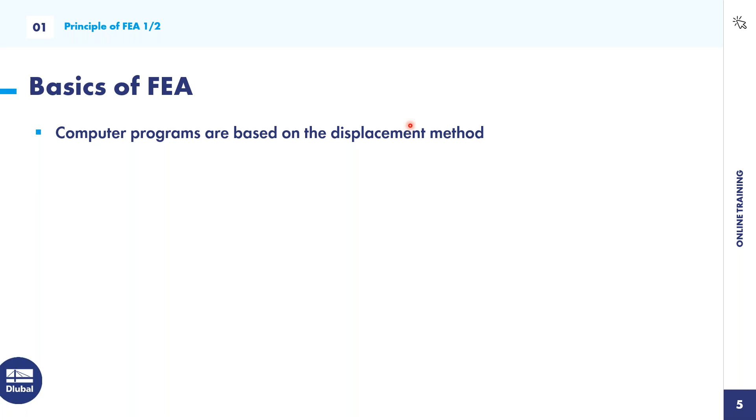This is maybe also something you learn in your studies, the displacement method. Maybe someone of you also knows the force method, where the unknown is the force, where you have to calculate first the force, and then you can calculate the internal forces. Here, the FEA programs work with the displacement method, so the unknown of this whole calculation process is the displacement. You calculate first the displacement vectors, and then you can calculate the internal forces and also the support reactions and so on.

This analytical solution of very complex structures is in reality really hard possible. So when you want to calculate something by hand or with Excel, you are going to reach the limits, because it's very hard to realize realistic results. So you have to use some FEA programs, some FEA software.

So what's going to happen there? The real structures are decomposed into a mesh of finite interconnected elements. That's also the name of the finite element analysis. So the real structure is decomposed into a mesh of finite interconnected elements. We will see it later in the example.

And then on each node of this FE element, the properties of the element continuum are described. Then the mechanical behavior is described by approximation sets. These approximation sets are the secrets of every software producer, every software creator. It's very complex.

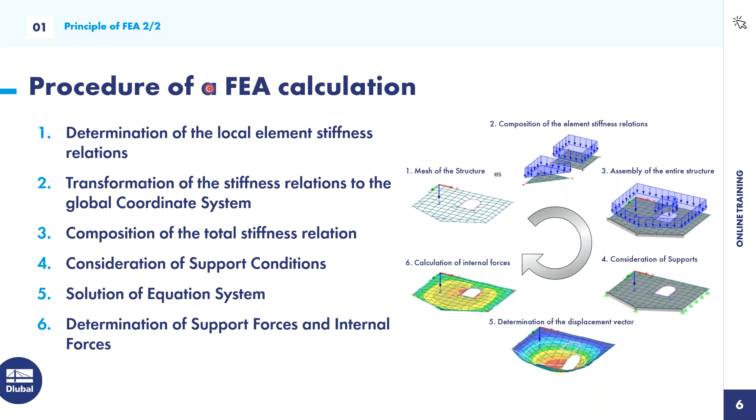And this was the basic procedure of an FEA calculation. And now we are going to do this little example. So first of all, we are going to model these three continuous plates. And then we are going to compare these results of this bending moment with a continuous beam. This will be very interesting, because then we can see the different results and so on.

Good. So let's jump to RFEM, the program.

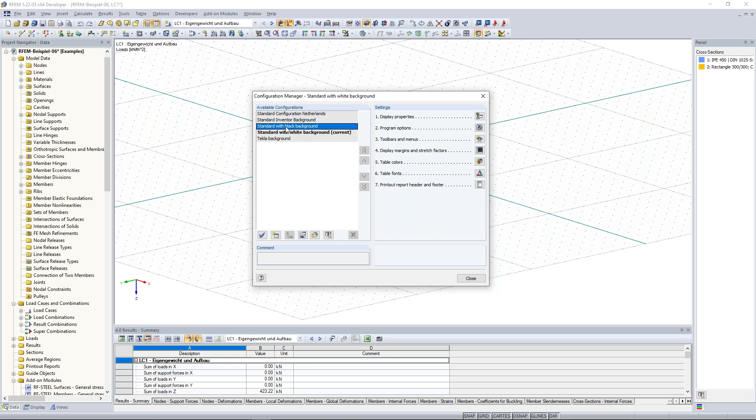So for those who are wondering why is my background white, here you can change it when you click on options and then to the configuration manager. And there you can see there is standard with white background. You can change it to the black background. So when I click here, standard with black background, double click and the background changes to black, but I prefer the white background. So double click again, and I have a white background.

It's up to you how to use it. I prefer the white background, but it doesn't matter. They give you several other options and also some edit possibilities and so on.

Below this menu bar you see the symbol bar. With the symbol bar, you have faster and quicker access to the most common used functions. So if you want to create some lines, just click on new line and draw your lines. This is very fast. By double right clicking, I finish and end this insert, and it's the same with a lot of other functions.

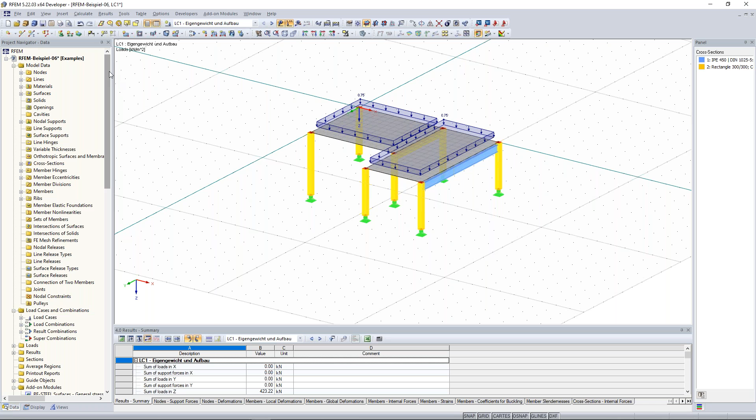On the left side you see the navigator. The navigator is very important for working with RFEM. You see all model data in the data navigator. Generally it has 3 tabs: the data navigator, the display navigator, and also the views navigator.

When I show the results of this structure, I also have the 4th tab, the results tab. But I want to begin with the data navigator.

With the data navigator, you have all the possibilities to have an overview of data like the nodes. When I click on one node, the node is selected, and with right click on that, I can also find this node, I see this here with the arrow. It's the same with the surfaces - all surfaces I created before, I can click on that and modify them, edit them, by just right clicking here.

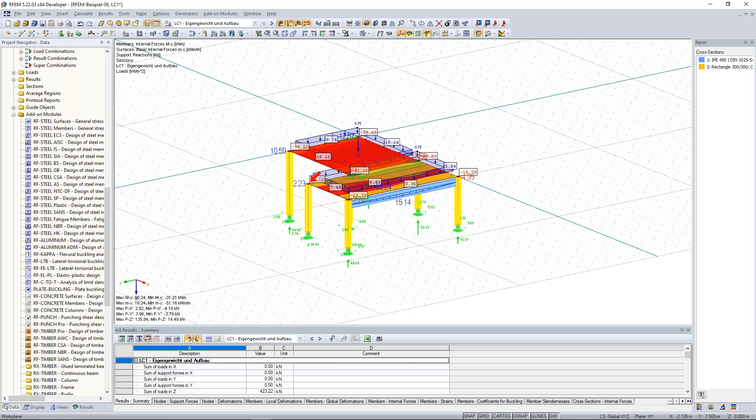It's also the same with load cases and loads, results, and so on. At the bottom you will find the add-on modules. Remember, RFEM is good for the calculation of internal forces, deformation, stresses, and so on. But if you want to design something, like a steel column or a concrete downstand beam, you have to use our add-on modules. They will give you the designs for different materials and areas like steel, concrete, timber structures, while RFEM is just for the calculation of deformation and stresses.

The next step is the display navigator. Here you can show models, loads, or extra results. In this case, I don't want to show the bearings, the supports. So I go to the models, then to the area of nodal supports, and deactivate it, and then I don't see these nodal supports anymore.

The same with the loads. When I don't want to see these loads, I have some surface loads here. I click on loads and deactivate the view of the loads. There are a lot of other possibilities too - maybe when you want to show the numbering of all objects, just click here at the display navigator, go to the area of numbering, and you see the numbering of the objects.

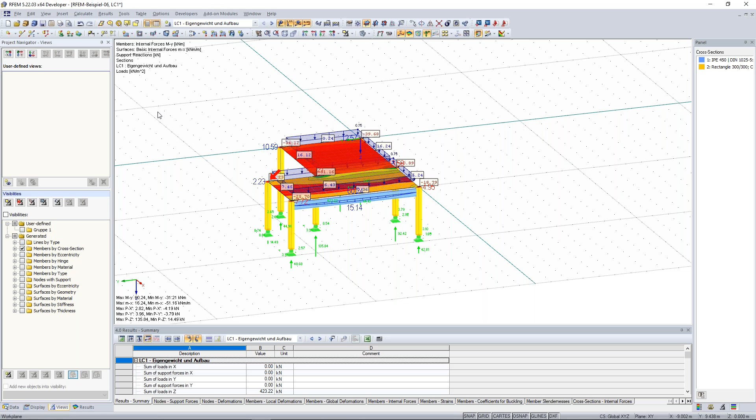Good, then I jump to the Views navigator. It's very helpful to work with a lot of views when your model is going to be bigger and more complex. So it may be for your interest to have some user-defined views. I close and deactivate the result view, and I like this view very much, so I save this view.

I can click here, create new user-defined view, and I write the favorite view. During my working process, I change maybe some views in order to work better with the program, with the model. Then when I want to skip to my favorite view, I just click here in the Views navigator to user-defined views, and you jump to your favorite view.

The same applies to visibilities. When you want to filter something, to show just the members or the columns, it's very easy to do here with the views. Now I want to show just the columns. I click here, members by cross sections, and I know the cross section of my columns is 300 by 300. So I click on the rectangle 300, 300, and all columns are shown.

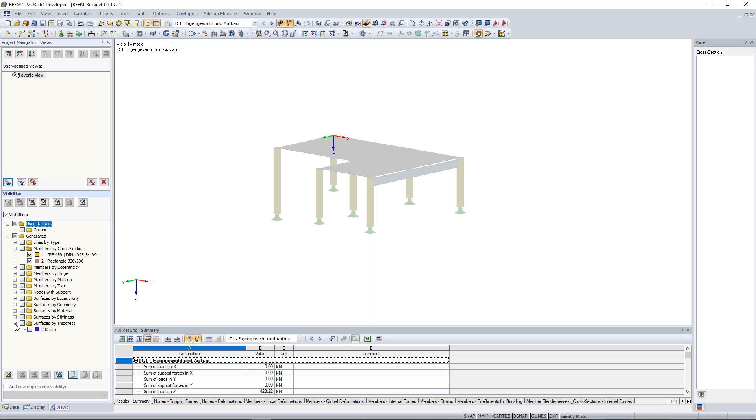When I want to add this downstand beam, this IPE profile, I click on that. And the same with the surfaces, so I click here, surfaces by thickness. I have two surfaces with a thickness of 20 centimeters. I click on that, and it shows me the surfaces.

Now to the fourth tab, the last tab of the navigator. Here I can show the results, first of all maybe the deformation under global deformation, but also some internal forces. So when I cancel the visibility mode I did before, I can show the bending moment.

Yeah, also the support reactions. Everything concerning showing the results you can manage here by the results navigator.

Good. Then something to the tables. Tables acts in a similar way to the data navigator, so when you want to create something new, you can do it here just by creating a new node. The same for the lines and surfaces.

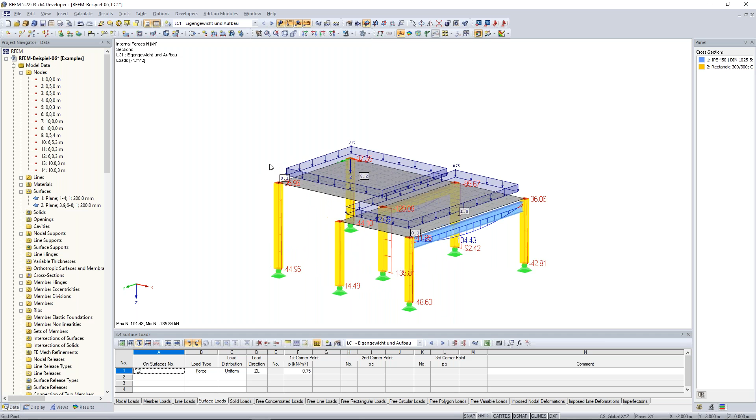Note the difference. With the mouse wheel, you can zoom in and zoom out. This is very important to know. When I press the mouse wheel, I can move my work plane, which is also important to know.

And with right clicking, I can open this context menu. Just clicking here on the work plane opens this context menu. When I do this on an object, it opens the context menu of that object, in this case the member or the line.

Good, and also when I want to rotate this building, just press the Control key on your keyboard and then press the mouse wheel, and you can rotate it. You can do the same functions here in the symbol bar with this icon for move, zoom, and rotate - you have the same possibilities and so on.

Good, so far to that. Now I have prepared some questions for you. Let's start with this one: I want to know from you what is a discretization. We had it before in the PowerPoint presentation.

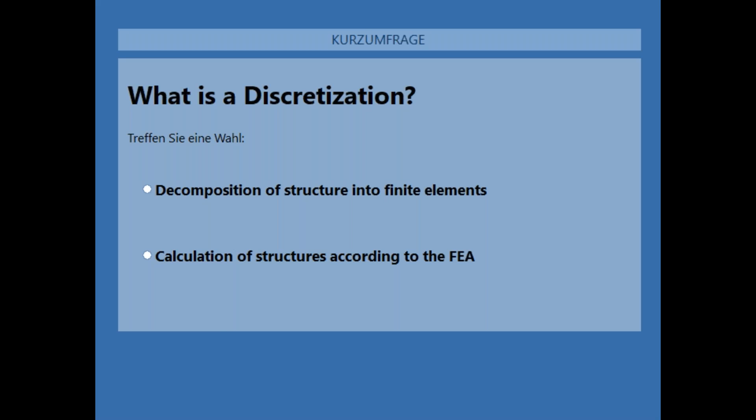Good, almost all of you have answered, let's show you the results. So yeah, 75% were correct. The discretization is a decomposition of structure into finite elements, good to know.

Good, and the next question is concerning RFEM. I want to know what is RFEM, what can it do.

I have to take a sip of water.

Good, 90% have voted, so I close this poll window here and show you the results. RFEM is a 3D FEA program for calculating members, plates, walls, folded plates, shells, solids, and also contact elements. So everything is there. But it's not a 3D structural frame analysis program - that's RSTAB, another program in our software suite. With RFEM you can calculate members, so also frames, but not only that - also surfaces, plates, shells, and so on. Keep that in mind when you work with our programs.

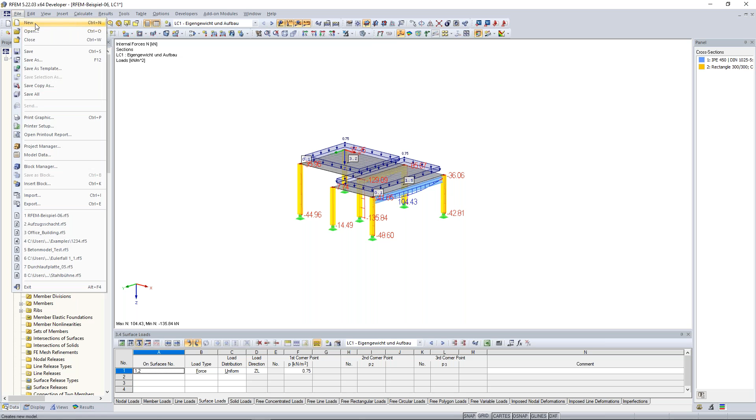Now let's start with the creation of our continuous plate. I create a new model - just click here on New Model, or go to the menu tab and say File, New. After that it opens this General Data window, and here you can insert the model name. In this case I give the name Continuous Plate.

You can make a short description, it's up to you. I save this to my folder examples - it's up to you, you can create a new folder, so a new project, or search for the right folder here at the project manager, it's up to you.

For me it's very important to differentiate this type of model. Here you have the possibility to choose different types of models - you can create a 3D model, 2D, and different types of 2D. This 2D type is especially for plates loaded by forces perpendicular to that. And this other 2D type is especially for walls or for 2D frames with parallel loads - these are plates acted on by wind loads, for example, where these wind loads act parallel to the plane. Keep that in mind.

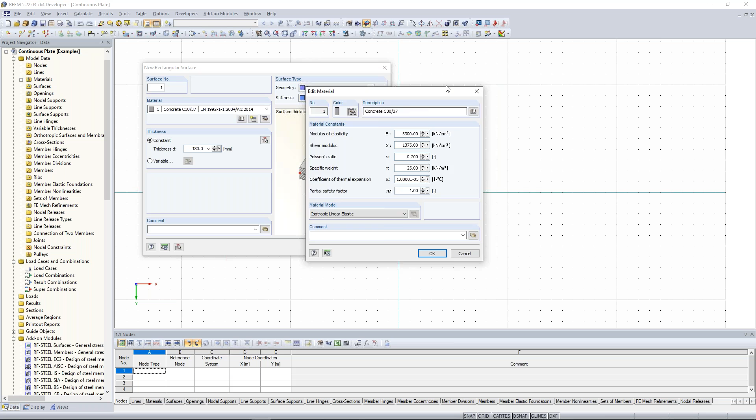For those where this concrete is not activated, you can modify or edit the material here just by clicking on this icon. You can put in your material constants and properties yourself, or you can open the material library and choose one of these materials from the library. In this case I have this concrete material.

I have normal concrete, not lightweight concrete, and I refer to the Eurocode. For those not from Europe - in Germany we use this Eurocode especially, and I refer to this Eurocode, but you also have the possibility to choose other concretes from different standards. But in this example I refer to the Eurocode. I choose this C30/37.

So what does it mean? The C30/37 concrete has a characteristic cylinder compressive strength of 3 kilonewton per square centimeter, and also a cube compressive strength of 3.7 kilonewton per square centimeter. That's what this C30/37 means. For those not from Europe, just click OK.

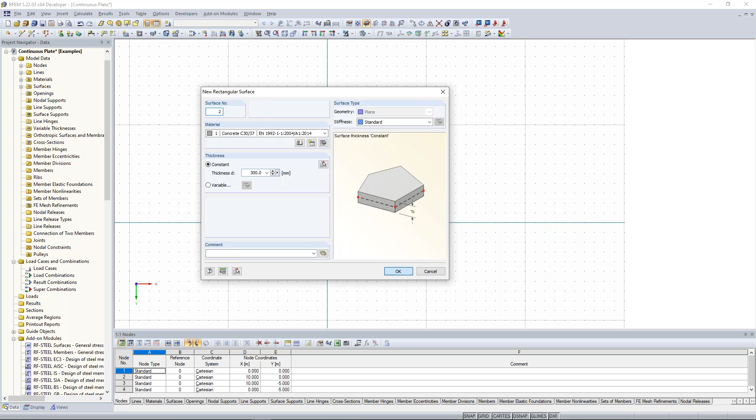Now to the next step. I want to create the same plate in order to practice it a little bit more. I create here a new rectangular surface again. The properties are already set, so I create the same plate again, but this time a little bit faster.

Now I want to copy this plate from there to there. So I do a selection window and select the whole plate, including the nodes and the lines. Now the whole surface is selected. By right-clicking, I open the context menu of these objects - I've selected the surface, but also the 4 lines and the 4 nodes. But I want to copy everything, so I click on move and copy.

To copy and move this plate, I have to enter more than 1 as a copy here. Then I choose the displacement vector, and the displacement vector for me is minus 10 meters, so the displacement is from there to there. I click on OK, and the whole plate was copied from there to there.

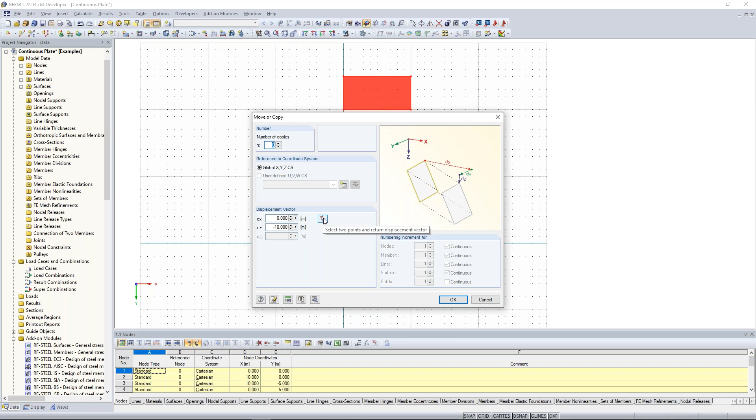Good. Now I want to move this 10 meters downwards. So I select everything again, then right click with move and copy. Now I don't want to create a number of copies, so set it to 0. I want to select my displacement vector, from there to there. I click on OK, and I copied it from there to there.

Good. To have a good comparison to our plate results, I want to create also a beam - a continuous beam. In this case, I have to create a new single member, to create beams, downstand beams, or girders, something like that. In RFEM, this is always new single member. So just click on that and click here to create a new cross section.

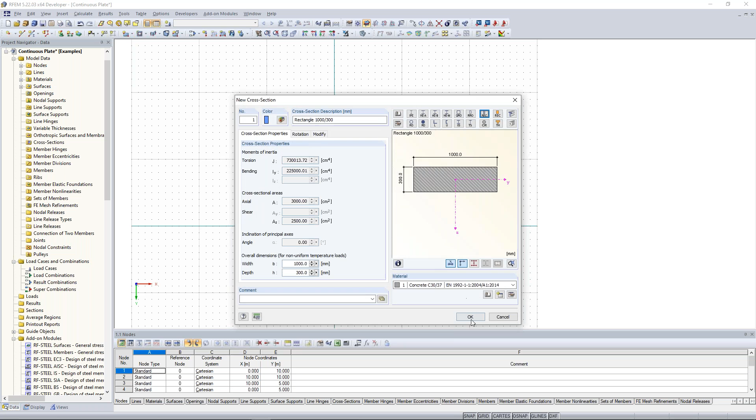I create a new cross section for member start. In order to have a good reference to the plate results, I want to create a rectangular solid cross section. I click here on the overview of cross sections, to the solid cross section rectangle, and type my values of a width of 1000 millimeters and a height of 300 millimeters. The material is the same here. Just click OK, apply this again with OK, and press this also again with OK.

Then I model this continuous beam from that node here to that grid point, and close this insert also with escape or with a right click on the mouse. Good. Next step is that we divide these lines in order to have lines to create line supports here. Now I change maybe a little bit my view.

We want to create a continuous beam here. So we need an additional node here to create our support, and also additional lines in order to create our line supports here. So we have to do that now. I change my view again to the front view by clicking on view in Z direction, and look again to this side to have this view. So what can I do?

I can divide lines in order to have an additional node on this line. So I click on the bottom line of this plate, of this surface, right click on that, and then I can divide the line graphically by n intermediate nodes or by distance. In this case, it doesn't matter what to use - everything is possible, but I want to show you the different options. So first of all, we do it graphically.

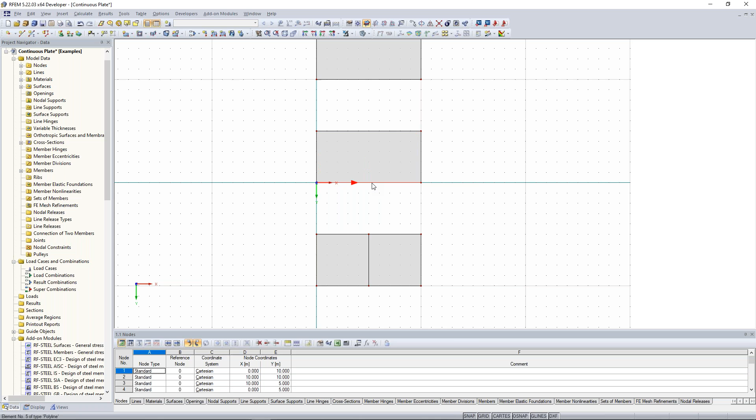And now click here from this node to this node. Good. By double escape clicking or double right clicking, I close this entry. We do the same again with this line. So right click on that line.

I divide the line, but in this case in intermediate nodes. Now it's very important to know these arrows. These arrows symbolize the orientation of the line. So every line, every member, has one node at the beginning and one node at the end, and this arrow shows me the orientation. In this case, this arrow shows from the left side to the right side. So this means that the line has at the left side its beginning node, so its starting node, and on the right side its ending node.

So when I want to divide this in intermediate nodes, and I put 1, it divides it at the half of this line. When I put 2, I have this. I have 3 lines, so 2 additional nodes, and so on. I put 1, and it was cut exactly at the half of this line. I create a new line again, from there to there.

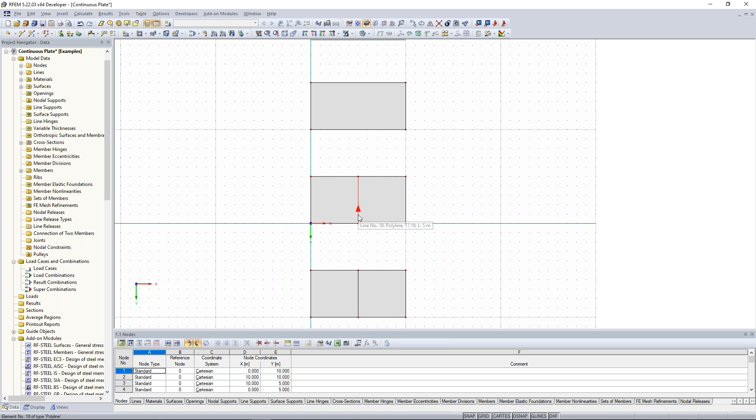Good. Now, a very important workflow in RFEM is copying something via drag and drop. This is important to know, it's one of my best tips to you. Just click on one of these lines, and now with the pressed Ctrl key and the pressed left mouse click, you can easily drag and drop something. When you want to leave it, just release the left mouse click. So again, I undo this with the keyboard combination Ctrl plus Z, and I want to do this drag and drop function again. So left click on this line, then press the Ctrl key and also the left mouse click, and release it here. This is a very important workflow and function of RFEM.

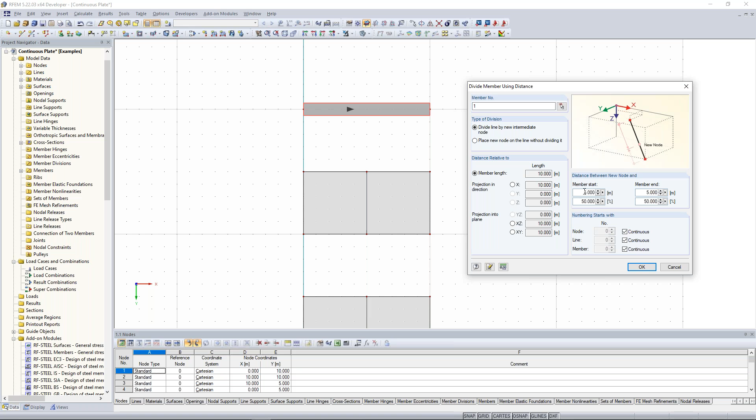Good. Now we want to divide this beam also. So I click here on this beam, right click on divide member. Keep it in mind, a member is also a beam or a column or something like that. Now I want to divide it by distance. Now I have again this orientation of this beam, the same again. On the left side I have the beginning node, and on the right side I have the ending node, because my arrow shows me from left to right. And I want to have the division here at 5 meters. I click OK, and that was it.

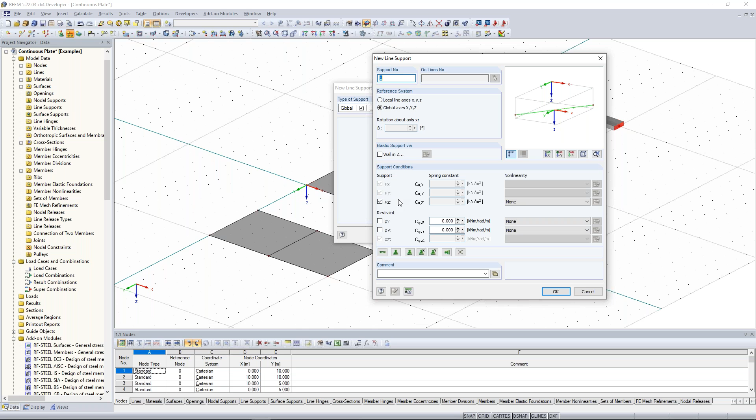Now I want to create the nodal supports and the line supports. First of all, the line supports, because we want to have here a continuous plate of these surfaces. So we need new line supports. Just click here in the symbol bar, new line support, and we choose this hinged support, because when we are going to watch these supports, we can do that here: create new type of line support. We see, okay, the UZ, so the support in UZ is activated. What does it mean? So when I activate some of these things here, restraints and supports, I block the deformation, I block the displacement or the restraints. So I want my support to carry vertical forces, so I have to block the displacement in the Z direction, and this is also the reason why there are going to be vertical forces. I press OK.

Now you can choose the local or the global. It's the same, you see it here at the arrows. Click OK, and now click on these lines here.

The same at the beam, but in this way I do it a little bit differently. So I select first of all this beam here, this part of the beam, because I want also to create here at these nodes this nodal support. Now I go to the symbol bar and click on new nodal support. And here in this case I choose again the hinged nodal support, click OK, and you see here the nodal supports. And for that point, for that node, we need a different nodal support, because at the moment it can be possible that the beam has torsion, and that it can rotate along its own axis, and this is something we don't want to have.

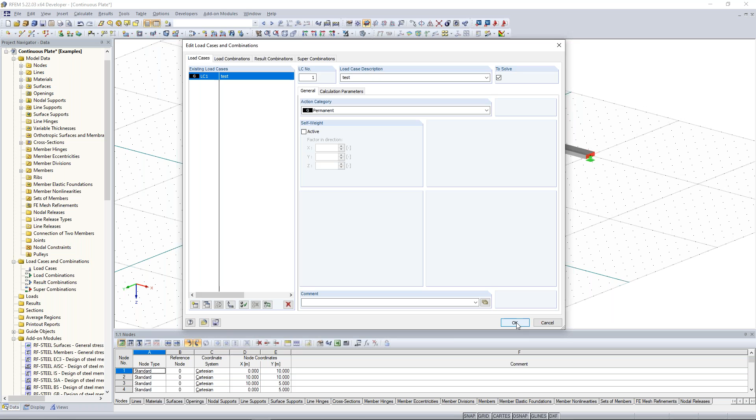Now I can put the loads on the surfaces and plates. Here I put the new surface load. It opens a new window, and I have the load type force, and the load distribution should be uniform, not linear, uniform constant. Because we are working in the 2D work plane, so we have a 2D object, 2D type, the load direction is only possible in the global Z direction. We have a magnitude of 10 kilonewton per square meter. Again OK, and I choose the surfaces here.

Good. Now I have to create it here also for the beam, for the member. Keep that in mind: we have in RFEM two possibilities of line or distributed loads, first of all the member load and the line load. Because we have a member here, it's very important to really use the member load for that. The line load is for the lines of a surface, like wind loads on edges. So when you want to put loads on edges of surfaces, plates, or shells, you have to use line loads. But if you have members with cross sections and so on, you have to use member loads. So keep that in mind, please.

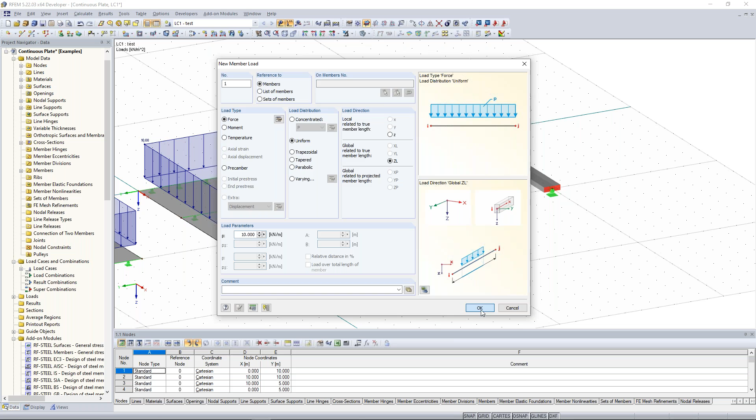I click here on new member load, put the same load parameter, 10 kilonewton per meter, and click OK. Good, so far to the insert of loads.

Praxitelis, I see some questions. Should we answer something? Should we do something again? We had several questions about the stiffness and the type of the plates. Maybe you could explain it in a minute. Could you explain about the stiffness type of plate?

Okay, of course. We have different stiffness types of plates. When I right click on one of these surfaces and click on edit surface, you see on the right side the surface type. First of all, the geometry - in this case we have a plane. So a plane is really when you have something in one plane.

And the stiffness - we have different stiffness types here. First of all, we also have the possibility to have maybe an orthotropic stiffness. Here at the bitmap, you can see different types of that. And when you click on the right icon here, you can edit the parameters of stiffness, and then you see also the stiffness matrix, and you can modify that. There are so many possibilities to do that.

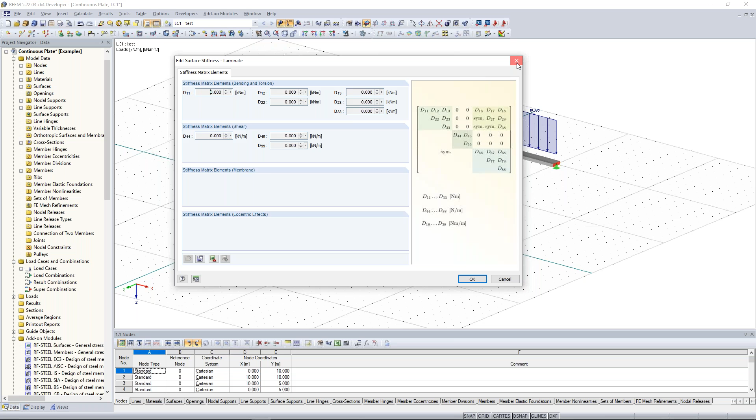Then we also have the possibility to have glass stiffness. There you have to use an additional program, RF Glass, because it's also a different stiffness type of plates. Also laminate, so when you want to do timber structures, especially cross-laminated timber, very famous, you can do that here by creating new stiffnesses. It's similar, so here you also have to use an additional add-on module of our software, and with the help of that module, it will calculate the stiffness matrix. You will see it later, and you can also make it rigid, so without deformation, infinite stiffness. But in this case, we leave it at standard. Good, another question?

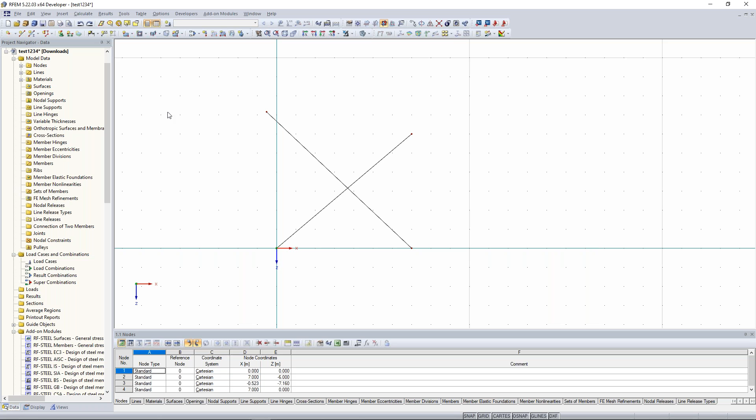Okay, good. Now I jump back to the continuous plate. We have inserted the loads. Now let's do the different FE mesh refinements, because I want to have a different FE mesh refinement at each plate.

Here I want the size of the FE mesh to be 1 meter, 0.5 meter, and 0.1 meter, because I want to show you the different results depending on the different FE mesh refinements - different FE mesh sizes. This is a very important point to know. Let's do that.

First of all, just click here on the surface. By right clicking on that surface, you can do an FE mesh refinement. Click here on new, and here you have the possibility to create a new FE mesh refinement.

Because we do this FE mesh refinement at the surface, the surface is just selected. So we apply it to the surface and put here a length of 1 meter. Just click OK and click OK again. You see this square - it symbolizes that here we have an FE mesh refinement of 1 by 1 meter.

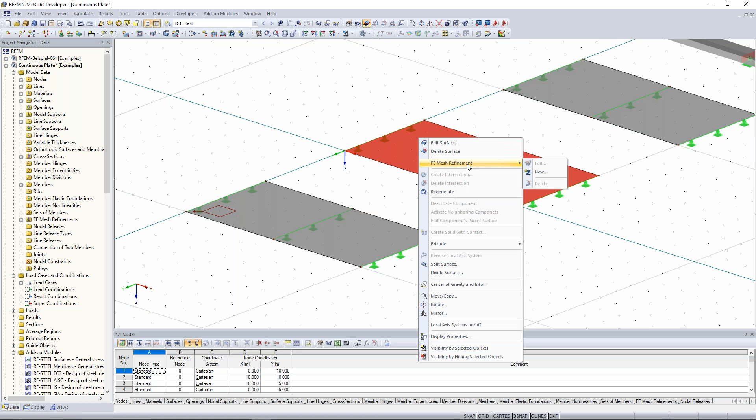The same we can do for the second surface. Here again, FE mesh refinement - go again to new, create a new FE mesh refinement, and here we put a value of 0.5 meter. Click on OK.

Now I told you also that you can do the same creation of model objects with the help of the data navigator. I want to do that, so I jump to the data navigator, go to the area of FE mesh refinements, and when I open this structure, I see the already created FE mesh refinements.

I want to create a new one. I click here with right click to new FE mesh refinement, and I refer first of all to a surface. I click here on this surface, the third surface, and then set a target FE length of 0.1 meter.

In order to see the results better, it's good to have a comparison of the internal forces of that beam and also of the internal forces of the plates. So in order to handle this better, we have to create sections.

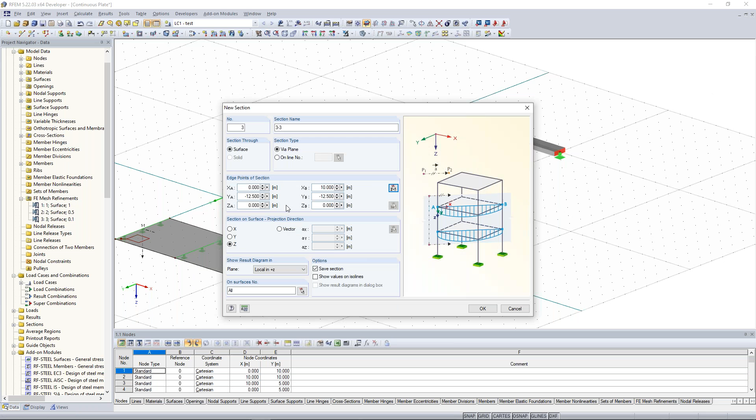And again, create a new section, 3 minus 3. Choose the right points and also the right surface. And then click on OK.

Good. Now everything is ready for the calculation, so we can calculate it, and this is what we are going to do now. Just click here on the menu bar, calculate, and you can calculate everything, or when you have different load cases and want to show one special load case, you can click here on calculate and then choose this load case, or just click here in the symbol bar, calculate all.

So I click here in the symbol bar, calculate all. The program is calculating, and this is what you are going to see now.

So first of all, you see the global deformation. But this is not so interesting. You can watch the deformation in some way, but more interesting are the internal forces of the member here, and also the internal forces of the plates.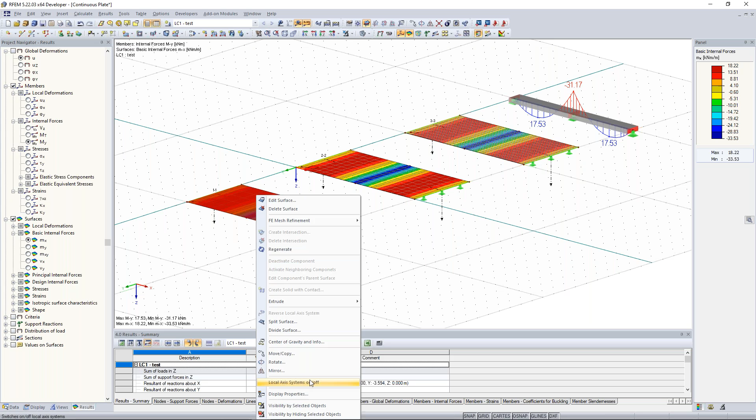So I activate it. I click here on surfaces. Now I see the basic internal forces mx. Mx means every surface has a local axis system. By right clicking, I can show the local axis system of the surface. Right click on the surface here at local axis system on off, and I can show the local system.

And the basic internal force mx tells me that these bending moments, these internal forces, are along the local x-axis. This is very clear because we have here field moments, here negative moments, like here at the beam. So in order to see the results better, I activate the sections.

Now I see the different results.

Now you can maybe see also the different results of the sections, and also the different sizes of the FE mesh, because here we have 1 meter, so at every 1 meter there is a result, and here 0.5 meter and here 0.1 meter. And what I want to show you is that it depends which FE sizes you have, because it can cause different results.

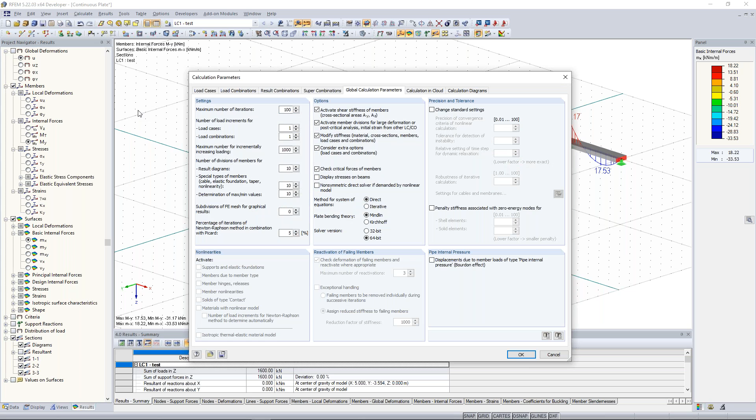Good. One important point is also when you go to calculate and also to the calculation parameters, that you have here the possibility to activate shear stiffness of members.

So especially in study when you want to calculate something by hand, maybe a continuous beam with the help of the force method, or also with the help of the displacement method, you can calculate your internal forces. And when you want to compare your results with the results of RFEM, it's very important to keep in mind that RFEM is always calculating with shear stiffnesses of members.

That's the standard, and this is maybe also the reason why you don't get the same results like in RFEM when you compare your beam results with the beam results of RFEM. When I deactivate this, I click on that, click on OK again, and I calculate this thing again. You see the internal forces, so the bending moments especially, changed here.

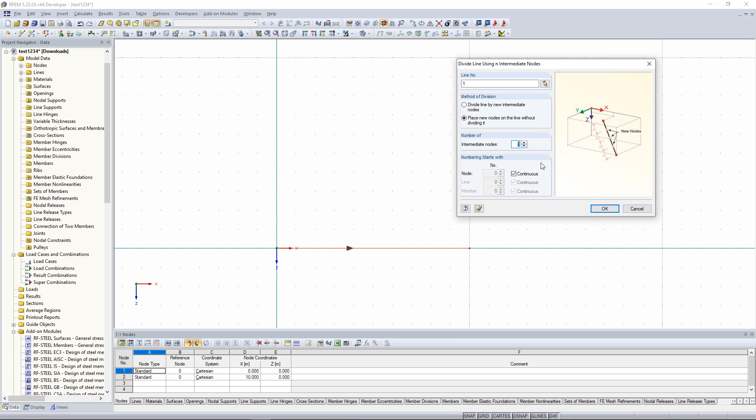Like I said before, you can create new nodes here, but then the node doesn't have any behavior on the line, so it works alone - it doesn't have any influence on that line. We can do that. So when I divide this line in one intermediate node, we get a new node in the middle of this line, but this line wasn't divided. And when I create a new line from there to there, these lines wouldn't act on each other.

So when I would have some cross sections or real members here, and I would put some loads there, they wouldn't have an impact on each other. This is something you have to know.

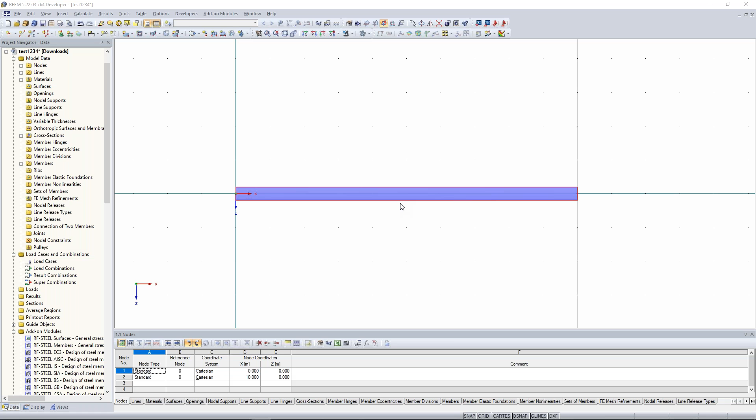I create now very fast some cross sections, some IPE profiles. Okay, so look, here we have this thing very small. I make it a little bit bigger. Good. So I make one continuous beam. I divide this again here, maybe a little bit by distance, so here in the middle.

And make also some sliding supports, nodal supports, and now I want to have a hinge here, so I have to divide it again. I create here a hinge. So in this case, in RFEM, we have to create member hinges. I go to this beam here, edit member, and I create a member hinge, normal moment hinge.

So in this case, I set the rotational release MY, and I create a hinge here. So now the whole beam is statically determined.

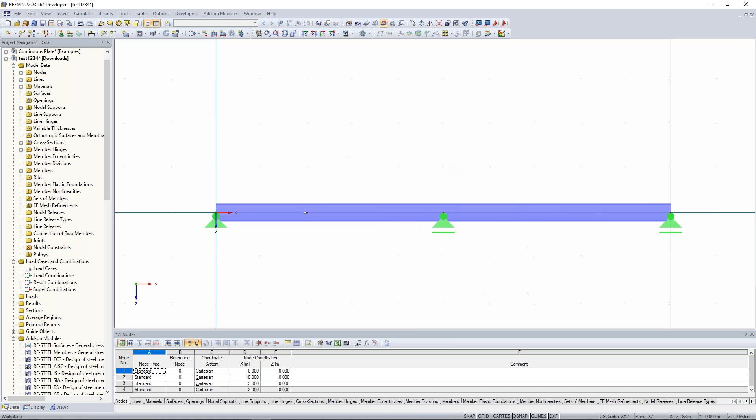And when you would have an additional hinge, like here again, so I make this here, then it would be unstable, because you have a hinge chain - we have 2 hinges, and then it would be unstable. So keep that in mind when you have 2 parts of members. It's okay to have just one hinge in order to consider the zero moment here. Two hinges would cause a hinge chain.

And when you would have 3 members, so I model one member again, and when you want to have a hinged joint here, just click on the upper member, create a new hinge, and then you have the hinged joint. But if you would do an additional joint, an additional hinge at this beam here, then you would again have a hinge chain. So the same amount of hinges as the amount of members would cause a hinge chain. Okay? I hope that answers the question.

Due to the hinges, exactly. So you have to consider it in the right way. And also, when you create hinges at the nodal supports, this is also false, this is not correct, because the nodal supports at the end or at the beginning are already hinges. Keep that in mind.

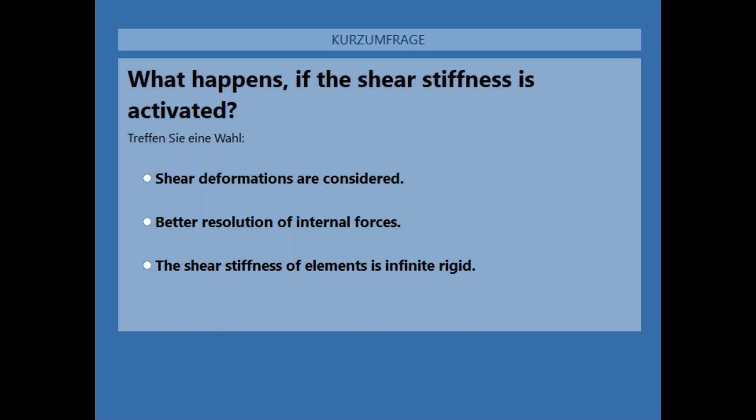Good. Maybe I will wait for some more answers. Just 60% have voted. Okay, good, I close this poll. And the right answer is the first one. So shear deformations are considered when the shear stiffness is activated. So I get additional deformation because we activate also shear forces due to the activation of the shear stiffness. Good, so much to them.

Now, again, to the a little bit theoretical part. I jump back to my PowerPoint. And now I want to tell you something about the plate theory, very important in my opinion. So I don't know how you learned this in your studies, but I learned it this way: we have two theories of beam calculations. On the one side we have the Bernoulli beam, and on the other side we have the Timoshenko beam.

So what does the Bernoulli beam say to me? In this case, the cross section remains in plane, and the cross sections remain perpendicular to the member axis. These are the assumptions of Bernoulli. What's very important, like I said before with the shear stiffness, Bernoulli doesn't consider shear deformations, so we have rigid shear stiffness. That's also the reason why, at first in your studies when you calculate beams and girders, you don't consider shear deformations, because a lot of books use general formulas to calculate continuous beams a little bit faster. And that's also why we don't consider that.

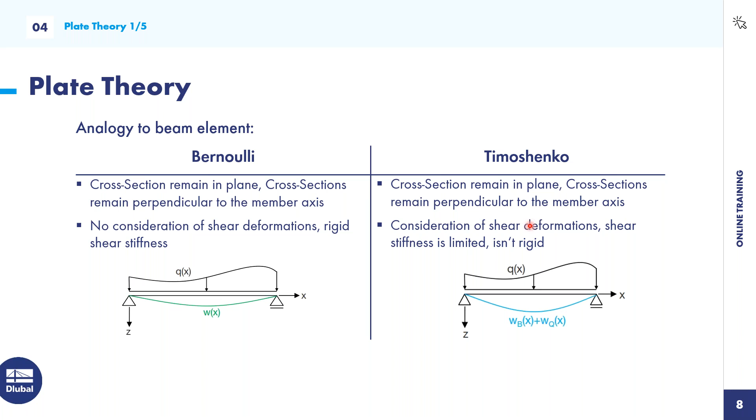On the other side, we have the Timoshenko beam. Timoshenko assumes at first the same positions: the cross section remains in plane, and the cross sections remain perpendicular to the member axis. But Timoshenko considers the shear deformations, so the shear stiffness is limited, it's not endless, it isn't rigid. When I show it to you in the image, here we can see the perpendicular: after the deformation, the deformation is perpendicular to the member axis. In the Timoshenko case, there we have an additional angle, so additional deformations due to the activation of the shear deformations, because we consider the shear stiffness here at the Timoshenko beam.

And these two theories refer to the plate theories, the plate elements. So the same thing as Bernoulli is, in this case, the Kirchhoff theory, and the same as Timoshenko is the Reissner-Mindlin theory. What are here the assumptions? First of all, geometrical linear, so we consider just small deformations. We use Hooke's law, and also the cross sections remain flat, in plane, with no warping, and a constant thickness. But the most important point is that we don't consider any shear deformations. In comparison, the Reissner-Mindlin theory considers shear deformation, and also additional strains of transverse or lateral strains.

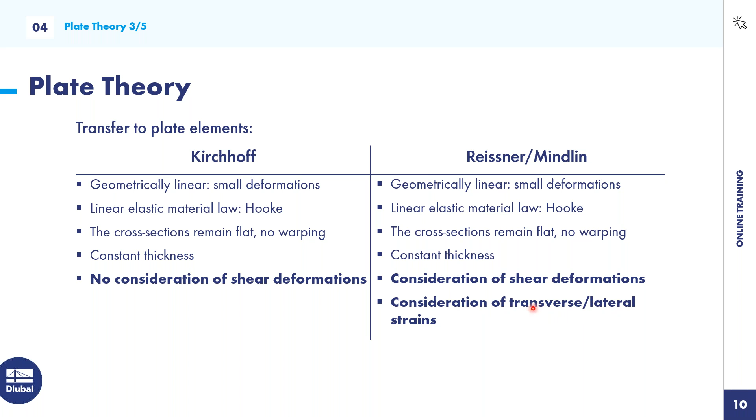Okay, good. To summarize it, I have on the left side Kirchhoff, and on the right side Reissner-Mindlin. To say it again: we have no consideration of shear deformations at Kirchhoff, and consideration of shear deformations at Reissner-Mindlin. So how to use this in practice?

Kirchhoff supports good results when I have thin plates, so when I have really normal slabs in the concrete calculations of buildings, so 20 up to 30 centimeters, the results are okay. But you have to consider that these are just pure bending load bearing capacities, so no consideration of shear forces, and the calculation is also just a simplified approach.

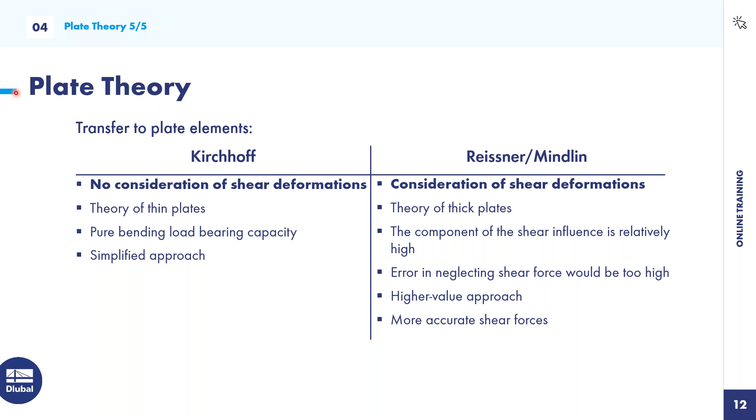Okay, now I'll show you this in the program. When I jump here to the model again, and go to Calculate and the calculation parameters, I have the possibility to choose one of these plate bending theories. In this case, the standard in RFEM is always Mindlin. Maybe you remember these results here. I changed to the Kirchhoff method, the Kirchhoff theory, and calculate everything again. You see the different results of the internal forces here, of the bending moments. Yeah, they're a little bit different. So keep that in mind.

If I would make this surface bigger, so with a greater thickness of this plate, the results would be more different. Okay, good, so much to the plate theory.

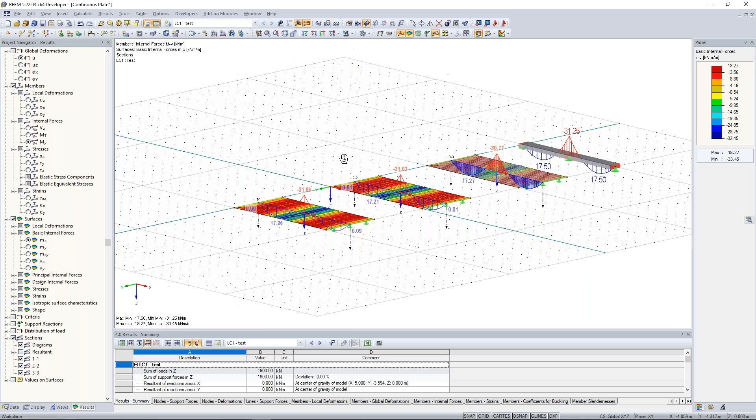First of all, when you have a really big model, it's up to you how you want to do the FE mesh sizes, because the smaller the FE meshes are, the slower or the longer your calculation needs. But the more exact results you get - not better, but more exact, I have to look up this word, sorry for that. Yeah, the more exact results you get.

And maybe you see it here again. You have here 3 different plates with 3 different FE mesh sizes, and you see the difference between those results is not so big. So calculating with a greater FE mesh could be maybe a good approximation to the exact result of this beam here. So it's up to you how to discretize, how to do your FE mesh sizes.

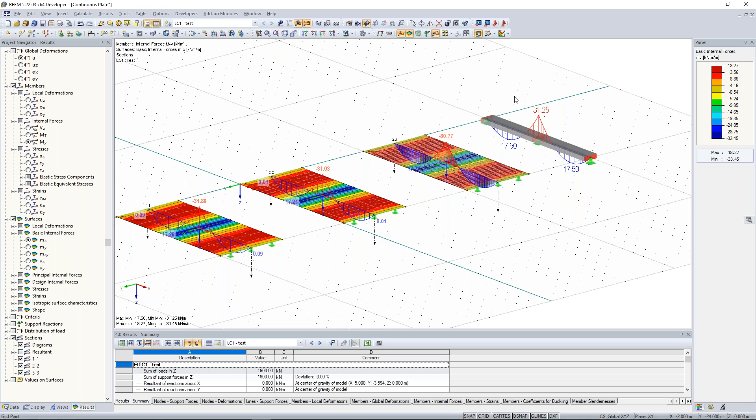So the difference is that we create 3 different types of FE mesh sizes, so of FE mesh refinements, and I wanted to show you the different results in comparison to this beam result here, to this member result here. Because when you calculate beams and members, the results are mostly exact, yeah, because it's easier to handle, to consider that in the stiffness matrix. But if you calculate surfaces, plates, shells, there will every time be an approximation to the right results. There will never be the exact solution - please keep that in mind.

And I wanted to show you the different results depending on the different sizes of the FE mesh. Okay.

Then we have the question: how can we have an aspect ratio for mesh size different than 1? This is possible when you go to Calculate and FE mesh settings. Here you can take more options, more settings to edit your FE mesh settings. First of all, when I wouldn't do the manual FE mesh settings here, so the FE mesh sizes here, the program sets the general target length of finite elements to 0.5 meters.

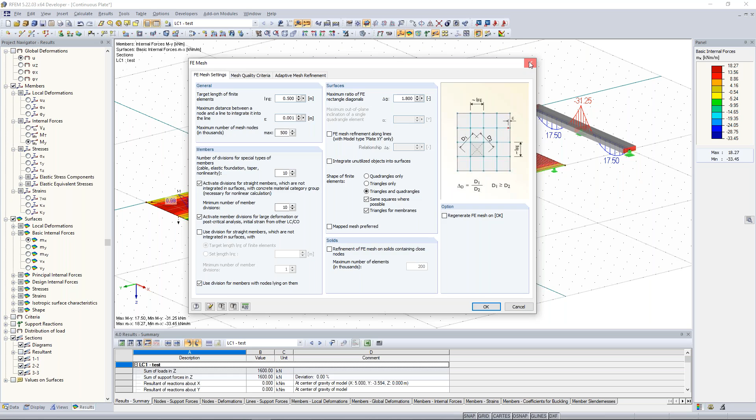And concerning the ratio of FE rectangle diagonals, you can do it here by delta D. You can adapt, you can edit this here, you can modify this here. And when you want to say, okay, I just want to use triangles only here, yeah, you can change it here. Please, here you can do that. Okay, good.

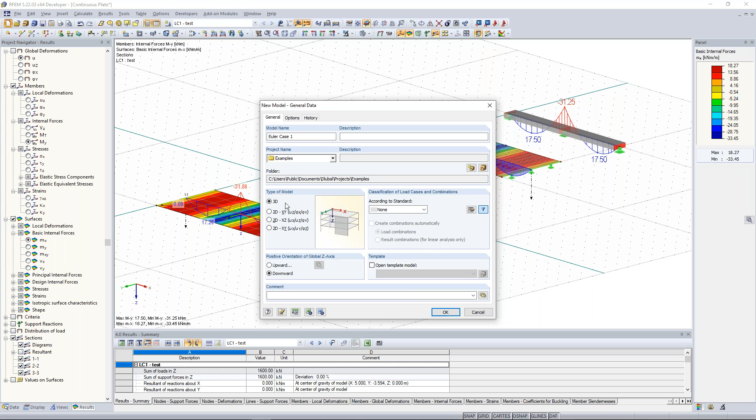So I create a new model. I enter the name Euler case 1, and now it's very important to have a type of model in 3D, because we want to look at both sides of buckling. We're looking at both eigenforms in both directions, and this is why I do that here.

So again, I want to create one member. Keep in mind, in RFEM it's also possible to create members and beams, columns, and so on. So I click here on New Single Member. I click here on Create New Cross-Section for Member Start.

And I choose this one, this HEB profile. For those who can see them, you can just click here on Import Cross-Section from Library, and here you have the possibility of a lot of different cross-sections. I choose here the I sections.

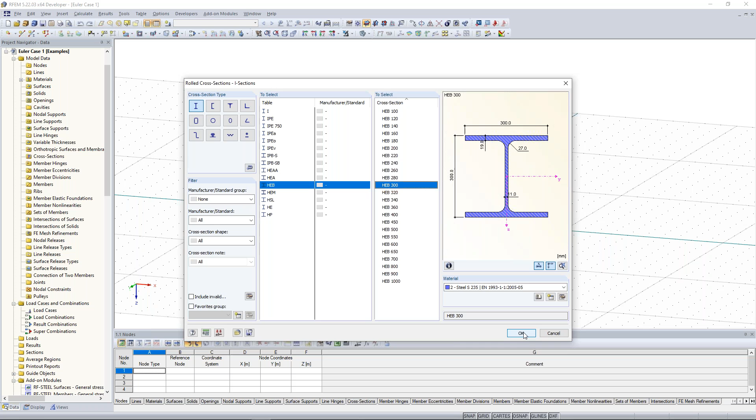Now you have the possibility to choose the right manufacturer and maybe also some different cross-section shapes, but I leave it as normal, so I choose the HEB. In Europe this profile is very usual. I choose this HEB 300 profile, click OK, then click OK again, and apply this again with OK.

And now, keep in mind, when you use the model type 3D, you will have different work planes. In this case, I have the work plane X, Y, and I can just model it in this work plane. So when I want to create some beams, it's not possible to do that into the height.

So I delete this again. There are two possibilities to do that. First of all, to change the work plane, so that I can model my beam upwards. Then I have this beam here. Or, when I delete this again and leave this as this work plane, I have the possibility to create my member perpendicular to the work plane.

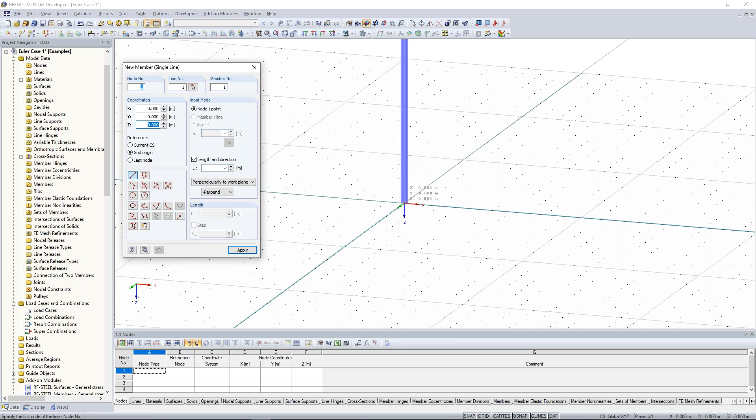In this case, it should be 10 meters high, so I put in a value of 10 meters. You see maybe also the member here, the column, but in the wrong direction. I want to have it in this direction, and I put it like that. And I have my beam here.

Good. Now the next step is to put there some supports. I want this as a clamped node here, clamped bearing. So I create here a new nodal support. First of all, I select this node here, then click on new nodal support, and then I say rigid.

So every deformation and every restraint is considered. Click OK. And this is my Euler column number 1.

Then I need additional node loads, so I have to create first a new load case. To do that, I click here on the symbol bar on new load case and click on test. It doesn't matter what the description of this load case is, but I deactivate again the self-weight because I just want to have clear internal forces. Click OK.

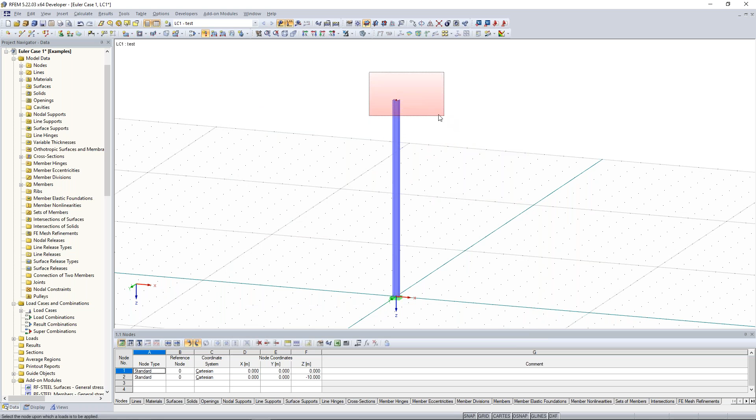Then I create this new nodal load, and now I want to have a compression force of 100 kilonewton and also a horizontal load of 20 kilonewton. Here you can refer to the directions of the nodal loads, with the help of this bitmap and also this global coordinate system. Click OK. Select this node here and you see the different nodal loads.

So now I want to show you a really important thing. I changed a little bit my view, so in the reverse Y direction, and I calculate now. I click here on calculate all.

And now you can see here the different internal forces. So of course the bending moment is minus 200 kilonewton meter, I think that's clear. Also the compression force of 100, and also the shear forces. But when you look to the deformation in the global X direction, it's 127 millimeters.

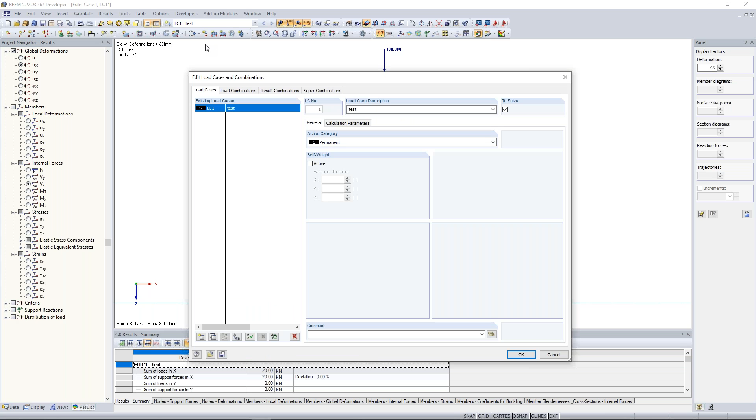Now I want to show you one important thing: the calculation after the first order theory, and the calculation after the second order, or the P-delta. Really important. So I open the load cases and combinations, and I want to show you the differences concerning these two calculation methods of analysis.

Generally the load cases are analyzed by a geometrical linear analysis, but load combinations, for example, by the second order analysis. Maybe you know that also under the name P-delta. I want to show you the differences between these two methods.

The second order analysis, when I choose that and calculate it, makes the equation, the equilibrium of an undeformed system. First of all, we had the first order, the geometrical linear analysis. There we make the equilibrium of the whole structure.

At the undeformed system. The P-delta method says to me that we make this equilibrium of the whole structure at an undeformed system - no, sorry, at a deformed system. The first order says we make the equilibrium of an undeformed system, and the second order, or the P-delta, says we make this calculation on a deformed system. Sorry for that.

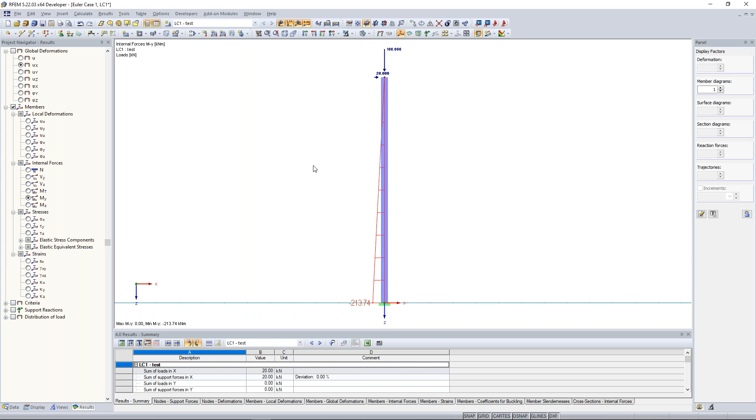But Daniel, maybe you could double click on it so everyone can see the member types. Okay, when I double click on that, you see here the member types.

And normally you have here as a standard the beam type. The beam types transfer all internal forces, like the bending moment, the shear forces, and also the normal forces. This is what we want to have. When you just want to transfer, I don't know, just tension forces or compression forces, you have to choose one of these other member types.

And when you want to have hinges at the ends, so that you don't transfer bending moments on the other member or the other members, you have to choose this truss type. Good.

Now I want to go ahead in order to show you the stability analysis. So I change this nodal load. I leave just the normal compression force of 100 kilonewton, and I delete this horizontal force.

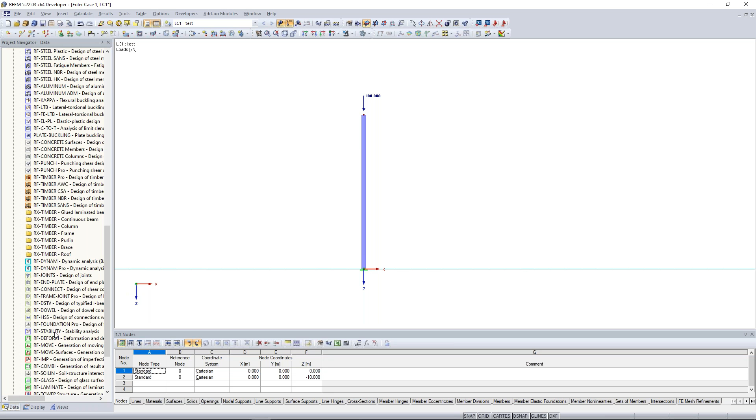And I activate here on the left side at the add-on module, the RF-Stability. For you students, when you use the student version, you have access to all add-on modules of our software. So I open this here, and now it opens a new window.

What does RF stability do? The stability analysis calculates, with the help of the eigenvalue method, the different eigenforms and also the different eigenvalues. Maybe like Euler, who was one mathematician. He calculated different cases and said, okay, this is my critical load factor, this is my critical load, and these are my critical lengths.

This is something RF-Stability does in a similar way. So in order to get the different eigenforms, the different buckling cases, I deactivate the minimum initial pre-stress of cables and membranes, since we don't have that, and also deactivate this. But now, very important, we activate the division for straight members, because every member is also divided internally by RFEM, and there we have to set the minimum number of member divisions from 2 to 10. This is very important to do. Click on OK.

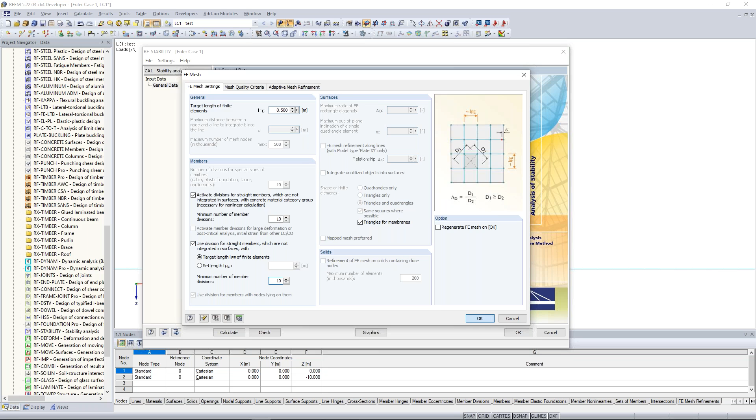And then let's calculate this thing. And we get, first of all, a critical load factor and a magnification factor.

What does the critical load factor say for me? This is the factor you have to multiply the load by in order to get an unstable system of your model. So when I multiply this factor of 4.4 with 100 kilonewton, I get a nodal load of 440 kilonewton, and my system is going to be unstable.

So there will be an error in the calculation of RFEM because the system is unstable, when I consider this method in the theory of second order, or P-delta. I have here also my effective length, and here the critical load, composed of this critical load factor. So if my column or member gets a normal force of more than 443 kilonewton, the system will become unstable.

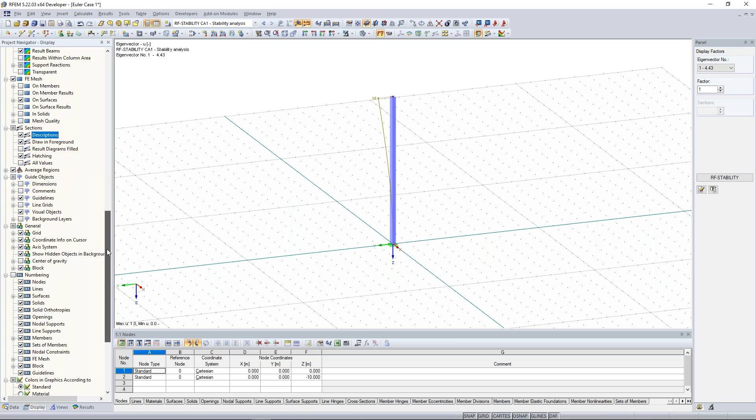Now I want to show you the different eigenvectors, maybe this eigenvector, eigenform, a little bit better. So I go to the display navigator. I click here on deformation, members, and show the cross-section colored. And now you see the first buckling case, the first buckling form of this column here. When we zoom in a little bit, you will see, I think that's very clear - we have our Euler case 1, so the buckling form, the eigenform, looks a little bit like that.

I think that's clear, and the first case when this system will become unstable is that the column buckles around his weak axis. When I show the local axis of this member, I see here this y axis, and here this z axis and the local x axis. The weak cross-section properties, the weak moment of inertia of this column, is around his weak axis, the local z-axis, and this is also the reason why the column buckles first around his weak, z-axis. When I change the eigenvector number to 2, this is around his strong axis.

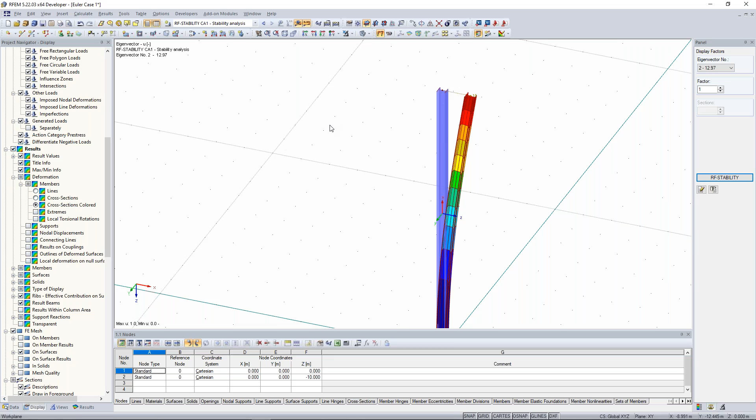And when you ask yourself why is it not exactly 2, this is because we considered again the shear deformations, so the shear stiffness. When I go back to these options, to this calculation parameters here, and I don't consider the shear stiffness of members, and calculate everything again, I get the exact effective length factors. So I jump back to this area of stability, and you see the effective length factor is 2, and also the effective length.

Good. So much to the stability analysis of the Euler case 1.

Now I want to show you what happens when you get a critical load of more than 443. So we have this nodal load of 100 kilonewton, and when I put in a value of 444 kilonewton, and calculate it with the P-delta method, considering second order analysis, you will see that my system will be unstable. I calculate it, and you will get this error, this calculation error, with a description saying that the stiffness matrix is singular, the model is unstable, and so on.

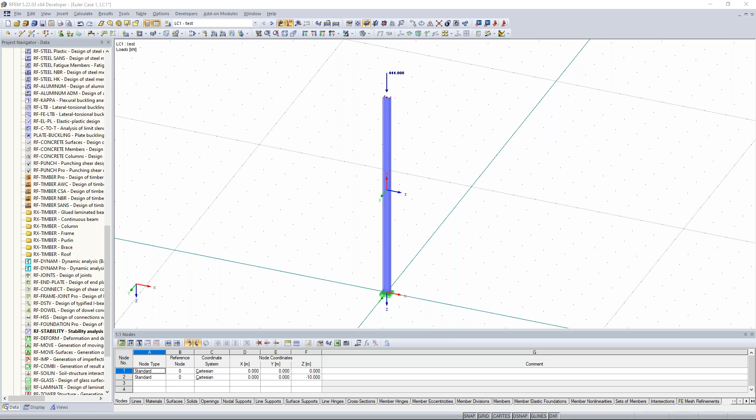Praxitelis, are there some questions? Yeah, there are some questions indeed. Someone is asking, what about torsion, lateral torsional buckling in the section? Yeah, of course, you can consider it with this program. You can calculate torsion too, but in this case, we don't have any torsion, but the program does consider torsion. That's clear, yeah, of course.

Because we have also our load at the... I don't know, Praxitelis, do you know the English word for Schubmittelpunkt? Torsion middle point, maybe, I have to look it up. Shear, don't know. Center of thrust. Yeah.

I'm sorry for that, because I have to look up one English word. Maybe I find it there. Someone is saying inflection point in the chat. Center of gravity. Inflection point, center of gravity, that could be possible, yeah.

So because the loads, if I have some nodal load like here, it acts on the center of gravity or inflection point of the cross section. And this is also the reason why we don't have any torsion. So normally, in RFEM, the loads are acting on the center of gravity or inflection points of these cross sections.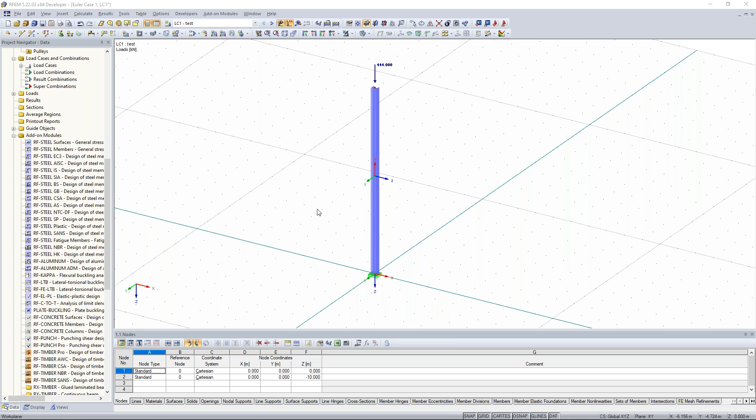So at the end, maybe I have something for you. I have a quiz for you, so please answer this test for me.

Good, most of you have chosen, so I close this poll here and show you the result. So yeah, most of you were right. A critical load factor specifies which factor can be used to increase the load until the system will collapse. Good.

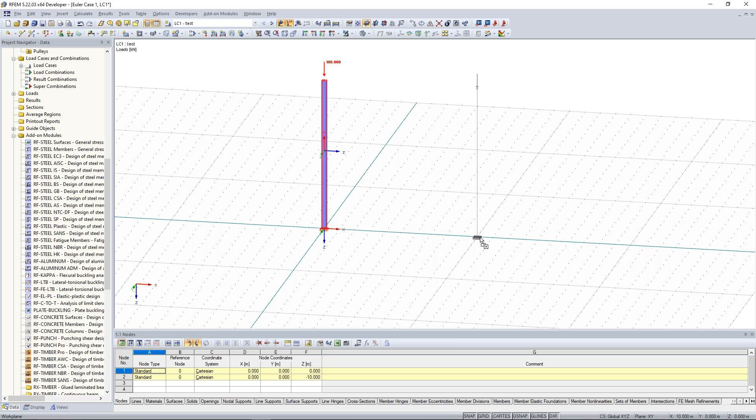So let's go ahead with the frame. There we do the same. So I change here maybe the nodal force from 400 to 100. And I copy this column here with the help of my favorite function, pair drag and drop. So with pressed Ctrl key and pressed left mouse, I copy it from there to there, 10 meters along the x-axis. Now I have two columns here, but I want to change the height of these columns.

So to change the coordinate of the nodes, it's very easy to do that. Just select these nodes, then per right click on node, you can edit the coordinate of the Z, yeah, and I put it to 6 meters because I want to have this column 6 meters high. So change it here, and automatically the program will set the height of these columns to 6 meters.

Then I want to create a girder here from the left to the right column. So again, I create a new single member. I create a new cross section, in this case an IPE profile, should be a height of 300 millimeters. Click on OK. Then I create this beam from the left to the right, and I have my girder here.

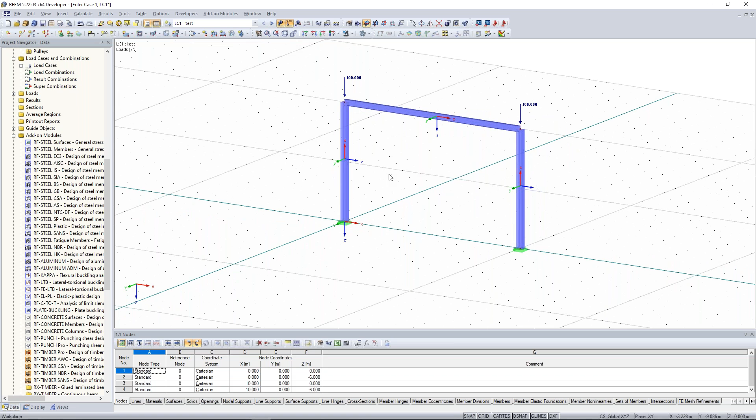Good, then I make the same thing. I calculate everything, and then we watch together first of all the internal forces, and then the critical load factors.

Good, so first of all we are going to watch the normal forces. I think they are clear. So in both columns you get a normal compression force of 100 kilonewton. Bending moments, we don't have any bending moments. I think this is also clear because we don't have any horizontal forces and also no shear forces.

Good. When I want to see, not the compression forces, the nodal supports, I can watch it here by clicking support reactions. I see the vertical forces of the supports. Yeah, good, but this is something not so interesting because I think that's clear.

More interesting is maybe the different eigenvectors. So again, here we have 4 different eigenvectors, buckling cases. And when you see, okay, the first eigenvector shows you a buckling form, eigenform out of the plane, yeah.

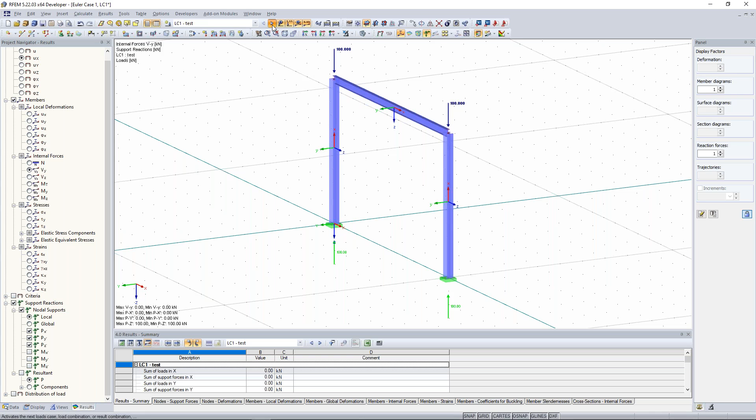But in reality, when you have cases like this, it's not so good because you have a form that buckles out of this plane. In reality, you have some supports who would hold this whole thing here in order not to have this buckling form out of the plane.

And when you watch a whole 3D hall, you have again additional beams along that side, and then you wouldn't have this eigenform here.

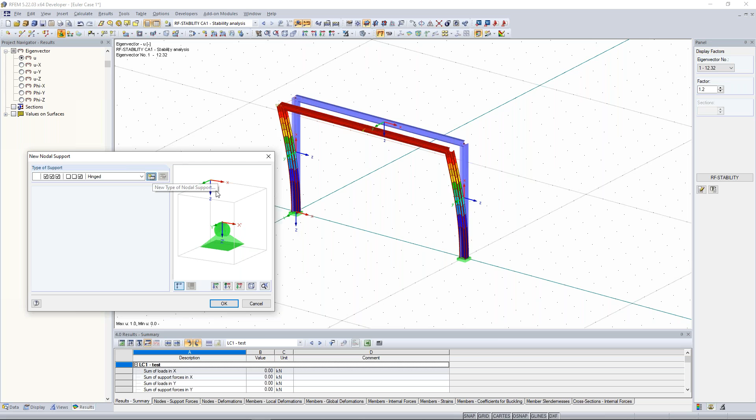Maybe in order to consider that, you can add an additional nodal support. So when I put it here, a new nodal support, and I want to block the deformation at these nodes out of the plane, I have to create a new nodal support and activate the displacement u-Y, and then the displacement will be blocked in this direction, and there will be forces, or forces could happen.

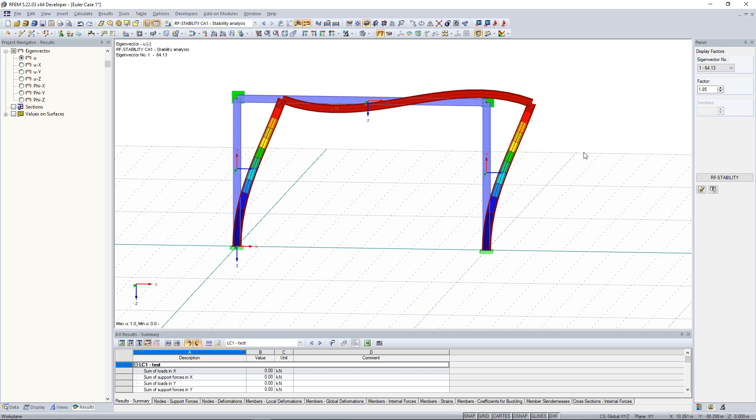So I choose here the nodes, and now watch out, our new buckling cases are new eigenforms. Now our first eigenvector is this one, that we have a buckling in this plane. This is also what we know from the structure analysis, from the study, because we calculate or consider it in a plane. So much to the frame.

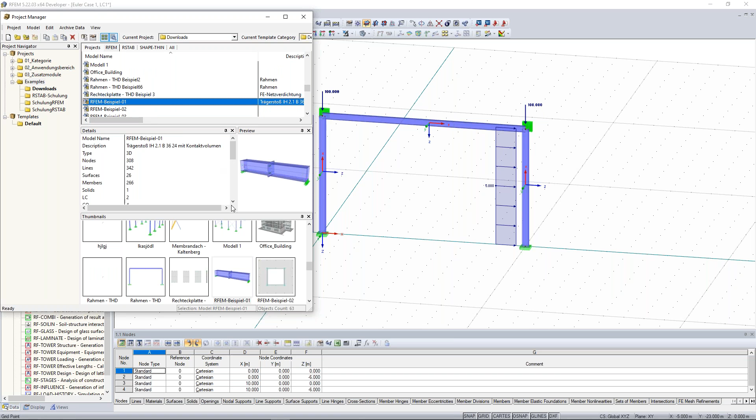This is maybe a very easy wind load, but when you have a more complex 3D hall, something like that, I'll show it to you. Maybe I open a new program where we have maybe a hall. I hope we have somewhere a hall. No, we don't have any hall. Here we have a hall.

And maybe you mean also the wind generator. It's very easy to do that. With the help of the tools, we have here the possibility to generate loads very easily. Here we can say from wind loads, and then say okay, vertical walls or flat roof, something like that. In this case, we have the vertical wall with roof. Then choose the right standard. In this case, I choose the Eurocode.

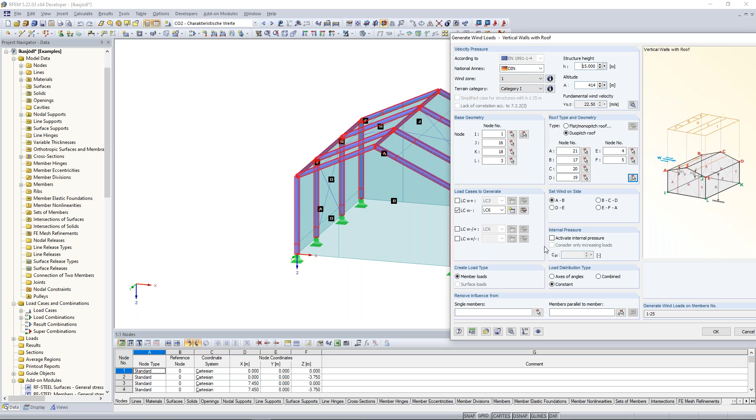And then with the help of this bitmap on the right side, you can easily pick up your base geometry. So I do that. I click here on this base geometry, and then also my roof type and geometry. So I go from there to there to there, and then I have to choose the right load case, and then I can set the wind on which side. In this case, I want to have this on that side. I can set the height of the structure, also the wind zone, terrain category, and so on. Then I say okay, and I have the different wind pressures and so on. I can show it to myself also separately like that.

Someone is asking if we can show a reinforced concrete beam. Yeah, of course. I'll make a test example here. When you want to do calculations with reinforced concrete, you have to use one of our add-on modules.

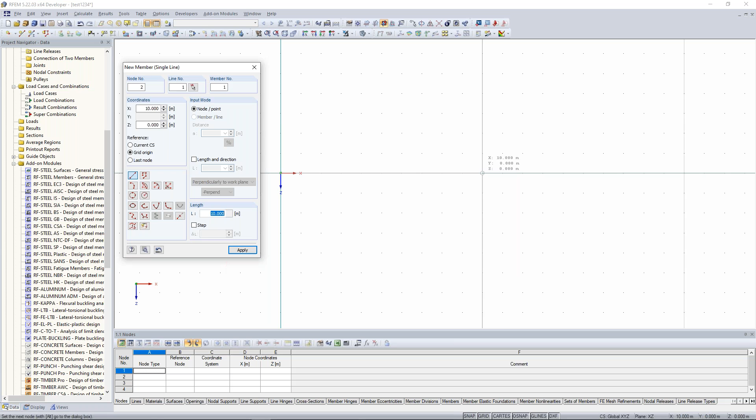So first of all, create the beam, choose a rectangular beam here, put in maybe some coordinates, I don't know, something like that. Choose also the right material, this is important. And then create your beam, 10 meters long. Then I need some supports, of course. I put here 2 supports. And then also loads. Sorry for taking some time maybe.

Yeah, good. And now you can calculate it. You get your internal forces. And then use the add-on module RF Concrete Members.

When I open this add-on module, you can preset first of all your ultimate limit state, so what you want to design and according to which standard. Then also the materials - here you can change some settings. Cross sections, supports, I think that's clear. And then here you can consider your reinforcements. So what do you want to use as rebars, which diameter should they have, and a lot of other stuff.

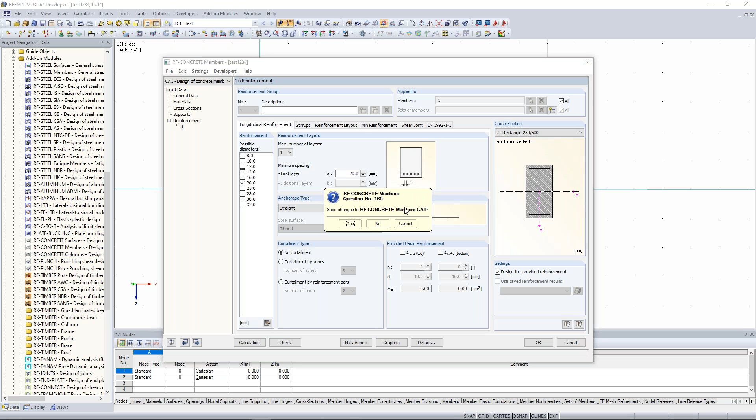It would take a lot of time to do now a single design of a single beam. But with the help of the add-on module, RF-CONCRETE Members, you can calculate these beams here. Okay, next question.

Please throw some light on geometric and material linearity, someone says. Can I see the question? Which time? 12:02. Please present material linearity. Okay, I understand.

So as I said before, we calculated these systems first of all here with the different linearities, so the method of analysis. So we have here the geometrical linear analysis and also the second order analysis. The geometrical linear analysis - what does it do?

I make the equilibrium of the whole structure at an undeformed system. And the second order analysis, or the P-delta method, says I make the equilibrium calculating the forces and the internal results at a deformed structure. And this was also the point where I showed you the additional bending moment.

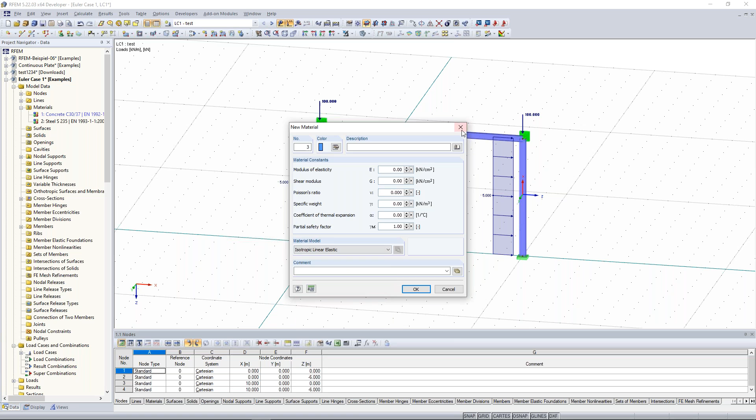Okay, Praxitelis, any new questions? We got many questions that are not that relevant to this training. Do you want to answer all of them? For example, foundation analysis or seismic loads. Yeah, these are questions not really referring to this training. I would rather answer these questions which rely more on the general part of RFEM. But horizontal loads, what do we do with? Maybe you pick up some questions which rely more on that basic training, but we will answer you later.

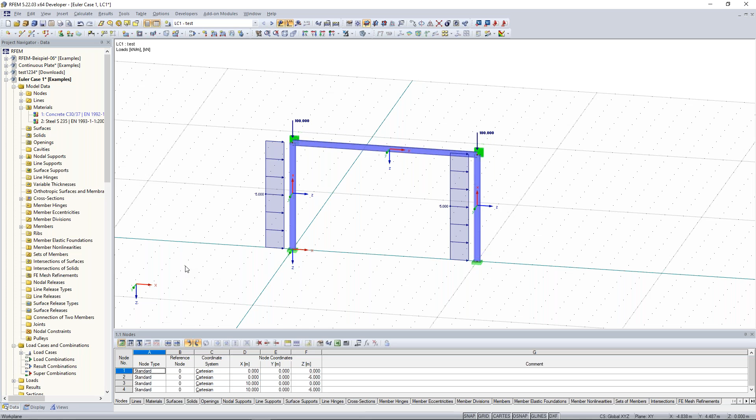Here you can identify identical nodes or overlapping members and so on. And for those who ask about errors concerning the critical load factors, with the help of RF-STABIL, you can calculate the different buckling cases, and then you will also see where the problem of your structure is.

I also have a very good FAQ concerning unstable systems, I have to look it up. Wait a moment, I have it here, and I will post it to the chat. So if someone gets the error 'my model is unstable,' what could be the reason? I would recommend this article, this FAQ, I'll show it to you here.

There are different checks to do. I created this article too. First of all, you have to check your model with different options of model checking. Then also check the stiffening. There can also be some numerical problems. How can I detect these causes of instability? I can do it here. I can recommend you this article.